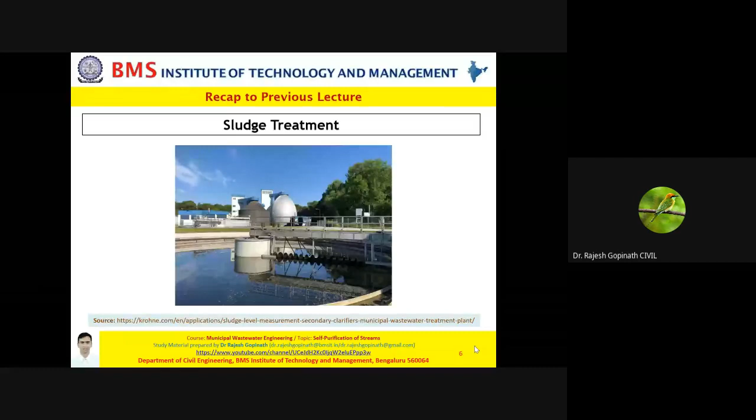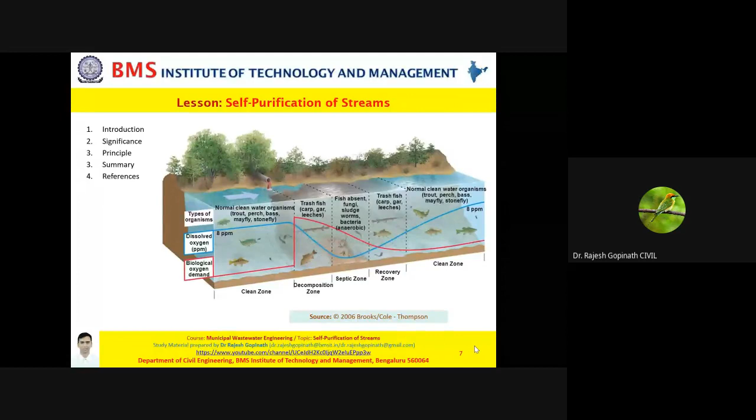If you recollect, in the previous class we had discussed the various technologies when it comes to sludge handling and sludge treatment. In today's class, we are going to move ahead and discuss self-purification of streams, or rather self-purification of rivers. I'll briefly introduce you to that concept, explain the significance and the working principle behind it, and finally summarize the presentation and list the references for your kind perusal.

Friends, whenever you say self-purification of streams, in simple words, there is some mechanism, some process naturally occurring in a river or a stream, wherein it will get automatically, naturally purified. If any wastewater gets discharged into a river or a stream, what will obviously happen? The water will get contaminated. Your river or stream will get polluted. The dissolved oxygen level will come down, and the biochemical oxygen demand will rise.

But as you go downstream, after a certain distance, you find that the water is again clean. Of course, it may not be 100%, may not be pristine, but relatively, as the water travels, after a certain distance it has cleansed itself, purified itself. The BOD level has come down and the dissolved oxygen level has reached the saturation level again. So when the river gets purified on its own, this phenomenon is known as self-purification of streams.

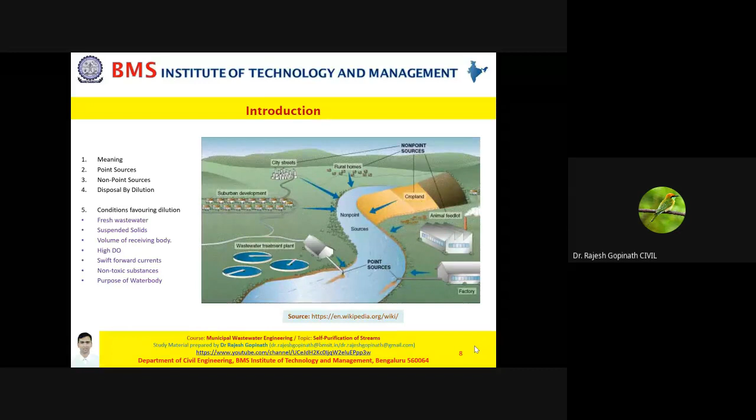So friends, what did we understand in this slide? We have got a brief idea of what is meant by self-purification of streams. Also, you understood that this has been taken as an advantage when we want to dispose wastewater, due to the principle of dilution. Thirdly, we have also understood the conditions which favor disposal by dilution, wherein we are aware that self-purification of the river will take place and the wastewater will get treated.

Now let's try to understand the various factors which are helping self-purification to take place. There are various factors, for example, dilution, dispersion, sedimentation, oxidation, reduction, temperature, type of the microorganisms, availability of DO, type of the organic matter, the sunlight, and of course your hydrographic factors.

Now friends, if you remember, when we spoke about activated sludge process, aerobic lagoons, or aerated lagoons, everywhere we were talking about treatment of the wastewater by aeration. In a lake or a pond or a closed system, the rate at which the air mixes with water is very less, and that is why you tend to go for mechanical aerators or diffused aerators.

But a river or a stream is a running water ecosystem. The water is running, so naturally a river or a stream has multiple turns or curves, and multiple jumps, as you would say waterfalls, of various heights; it could be a mini fall as well. So due to these turns and curves, the rate at which air mixes with water is very high. Therefore, you don't have to introduce a mechanical aerator or a diffused aerator. The aeration is taking place naturally, thanks to the velocity and the currents.

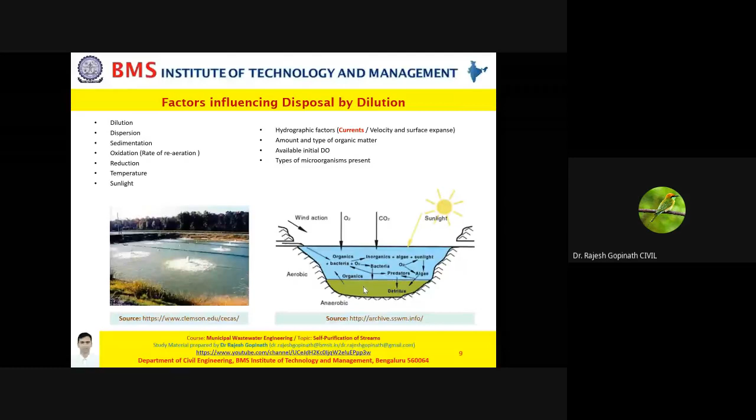So now let us come to the last part of today's presentation, that is zones of pollution or zones of purification in the river or a stream. Now this is very important for us because this can also be called as zones of tolerance. I would humbly request each of you to observe very carefully this image. Now we have typically 4 zones. Please listen to me carefully.

Please observe carefully. First is your clear water zone or clean zone. Second one is zone of degradation, or zone of decomposition. The third one is zone of active decomposition, or rather septic zone. The fourth one is the zone of recovery. And of course, the final one is your clear water zone or clean zone.

I'll repeat once again. Zone number 1 is the clear water zone or clean zone. Zone 2 is zone of degradation or zone of decomposition. Third zone is the septic zone, which is the zone of active decomposition. The fourth zone is your zone of recovery. And finally, of course, you have the first zone repeating, which is your clear water zone.

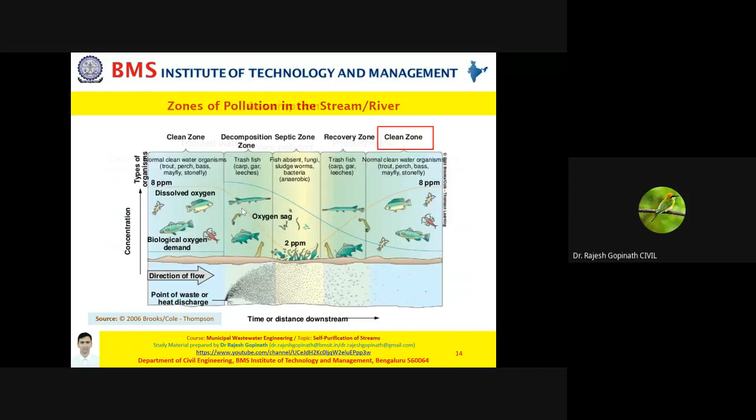One thing you need to understand is, we do make an assumption when it comes to this kind of study, and the assumption is the wastewater is entering the river only at one point. Let's go back. If you look at this image, the wastewater is not entering in zone 1, zone 3, zone 4, or zone 5. The wastewater is discharged only in zone 2. This is one of the critical assumptions, and only if this assumption is valid can self purification happen.

Why most rivers in India do not get self purified is probably because the assumption fails. Let us say you talk about the Ganges, which is one of the longest rivers. The reason why Ganga is not getting cleaned up or purified is because the self purification capacity has been exhausted. It is not because Ganga doesn't have a surface expanse. It is a long river, the water is very fast, but the rate at which we are dumping the waste material is exceeding the self purification potential.

And not only that, you're not giving Ganga time to get self purified, because at every kilometer or less, if there are industries and municipalities discharging wastewater, where are you giving the Ganges the time to recover? So please remember this very carefully. A critical assumption for self purification to be successful is from zone 2 to zone 4: until zone 5 appears, the wastewater is not discharged anywhere into the river except in zone 2.

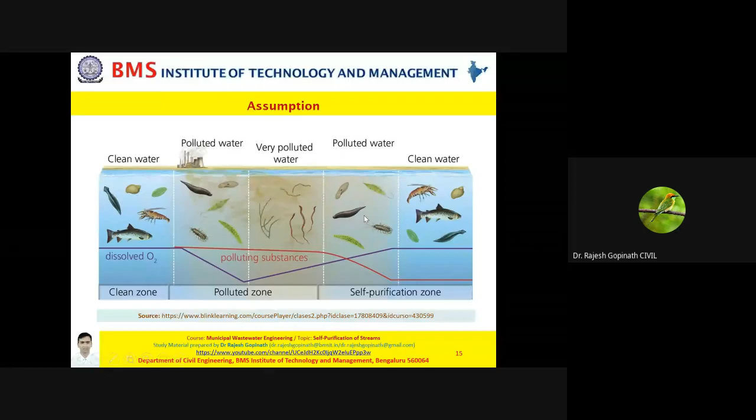As you can see in this image, the first zone was a clear zone, but zone 2 and zone 3, your zone of degradation and septicity, are actually the polluted zones. It is in the zone of recovery that self purification commences. Now let's have a recap of what we have understood with a small video. I'm sure this will enhance your understanding.

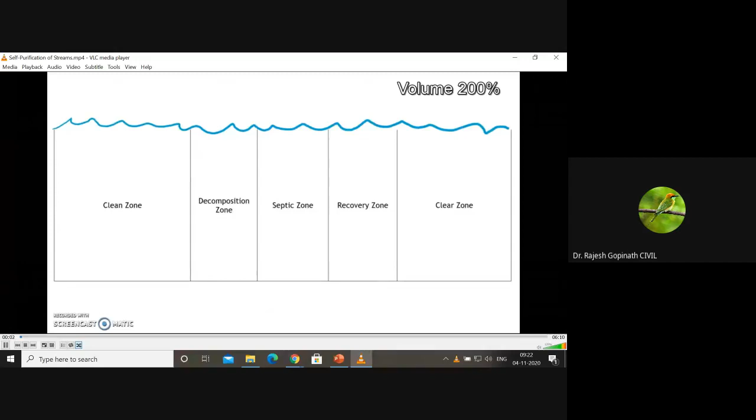Hello, AP Environmental students. Today's YouTube video is going to go over sag curves, which basically show a graphical representation of what happens to a stream or a river when you have organic pollution dumped into that river, and the effect on the dissolved oxygen and the BOD. As you can see from my diagram, we've got a stream or a river that has 5 distinct zones: the clean zone, the decomposition zone, a septic zone, recovery zone, and a clear zone.

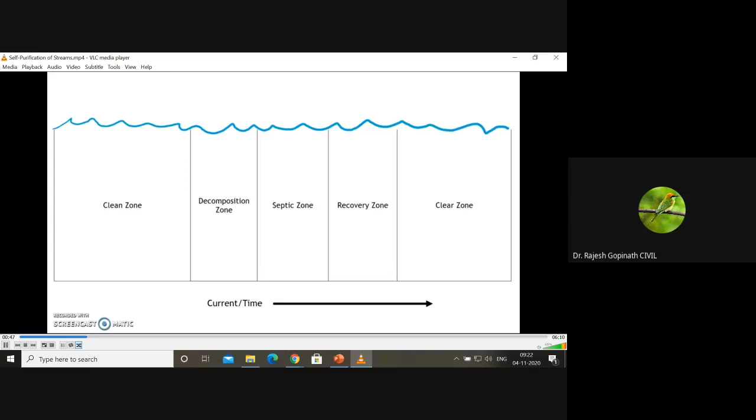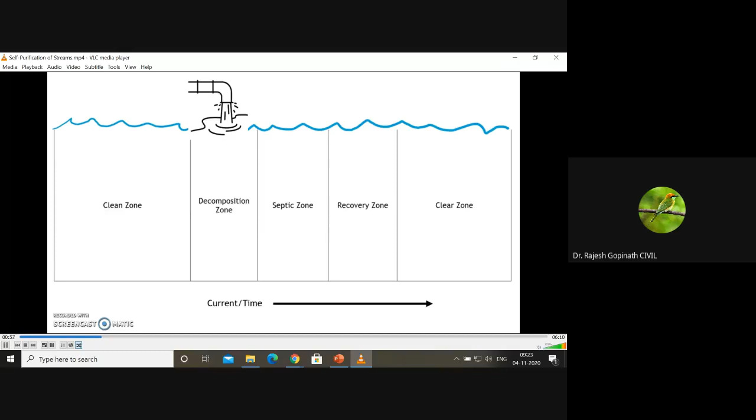Again, if this is a stream or a river, imagine that your current is going towards the arrow. We can say that this is the current, the time after dumping, or the distance from the actual dump site. Let's say our dumping is occurring right by the decomposition zone, and what's being dumped is organic pollution. Organic pollution is pollution that came from or was once living. This could be sewage spills that include fecal matter from humans or other animals.

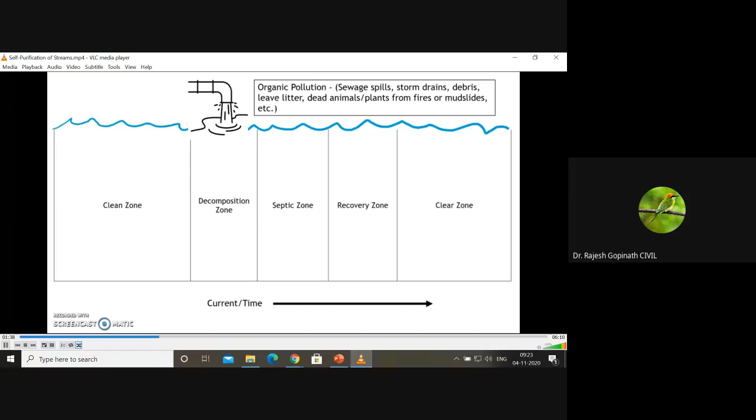It can be storm drains that have picked up debris on the way, things like dog feces, animal feces, goose droppings, leaf litter, dead animals and plants from natural disasters like fires or mudslides. Anything like that. Again, it has to be organic pollution, meaning it was once alive or came from a living thing. So our pollution is being dumped right over the decomposition zone. And what you'll see here with this red line is the BOD, or biological oxygen demand.

So we need to understand that as we move downstream, when the wastewater was discharged, the DO level is going to reduce gradually.

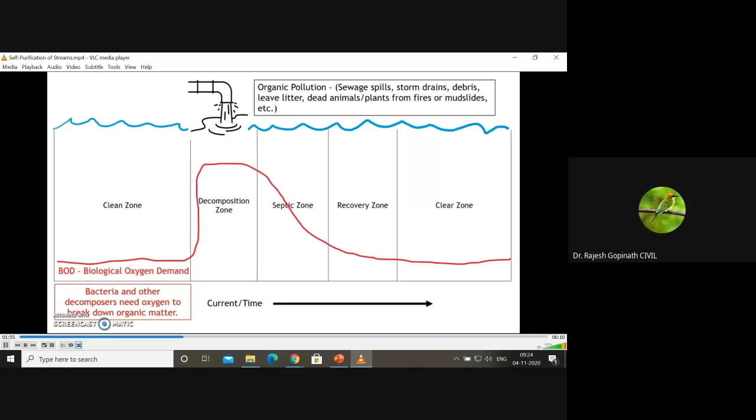And reciprocally the biochemical oxygen demand is going to rise up, because the dissolved oxygen which is present in the water has been consumed by the microorganisms who are feeding on the organic matter. And the biological oxygen demand is the oxygen needed by bacteria and other decomposers to break down organic matter. So you can see that in the clean zone, we've got a pretty low level of BOD, or a low level of biological oxygen demand.

And then all of a sudden in the decomposition zone, we shoot straight up. We have this major increase because we have all of this organic pollution that's being dumped right here. So we've got this organic matter that needs to be decomposed. So all of a sudden, all of these decomposers need to do a lot more breaking down of organic matter, so they need a lot more oxygen. As we get further and further from the dump site, that biological oxygen demand decreases until we finally get it back down to normal levels in the clear zone.

Alternatively, this also shows our level of dissolved oxygen. And our dissolved oxygen is the oxygen used by those decomposers to break down that organic pollution. So we start really high in the clean zone, and we have the sharp drop off in the decomposition zone until we finally get to this low point here in the septic zone. And this low point where I've got my star is called the sag point. This is why it's called the sag curve, because we show the sag of dissolved oxygen in a stream or a river or marine body of water. The sag point, again, denotes our lowest level of dissolved oxygen in our water.

So we also equate that to the worst zone for marine life because our oxygen levels are so low. The marine life you'll find here is not going to be things like fishes and marine mammals and those kind of things, because there is not enough oxygen for them. We're really only going to find bacteria and other decomposers like worms that are actually doing the decomposition of this organic pollution that's been dumped.

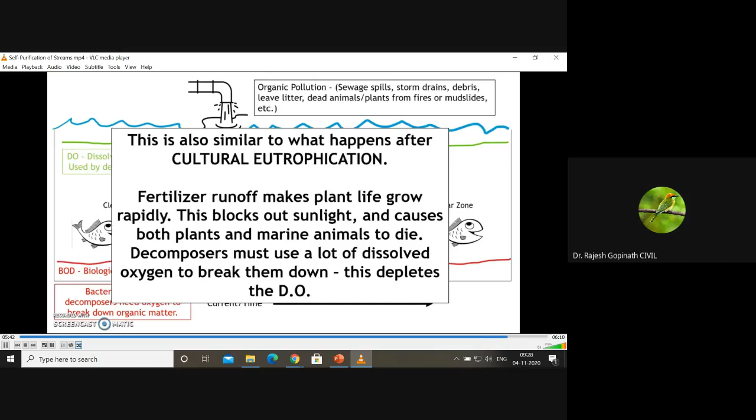So what we need to understand from this video is, the reason why I continued the video with the eutrophication part is because, as I told you in the beginning, when we speak about aerobic lagoons, aerated ponds, we are adding oxygen by giving aeration. But in self-purification of rivers, mechanical aerators are never in place because of the hydrographic features, the velocity, the currents, and the expanse. So please do not forget that if a river has to be purified on its own, the river needs to be running fast, running long distances, and has to be wide. And of course, apart from that, the human beings have to understand what is the carrying capacity or what is the potential of a river or a stream to get self-purified.

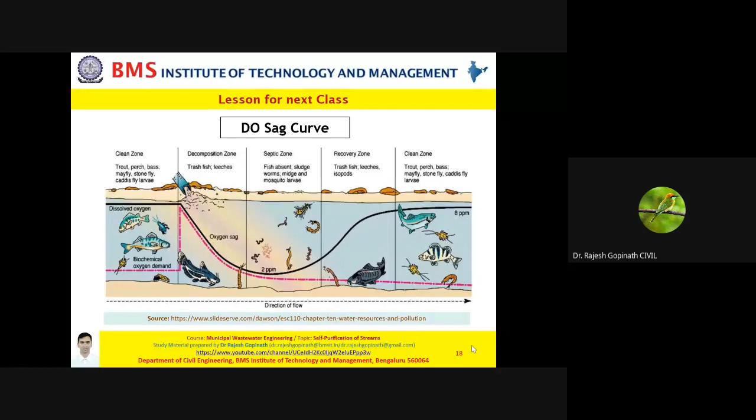So friends, this is the end of today's presentation, wherein you have understood what are the various factors which influence disposal by dilution, that is self-purification of rivers. You've also understood primarily what are the 5 zones of pollution, or rather purification, in a river or a stream. So these are the references for your kind perusal. Now in the subsequent class we are going to understand about the DO sag curve, dissolved oxygen sag curve, wherein we will try to understand how it functions in relation to the biochemical oxygen demand curve.